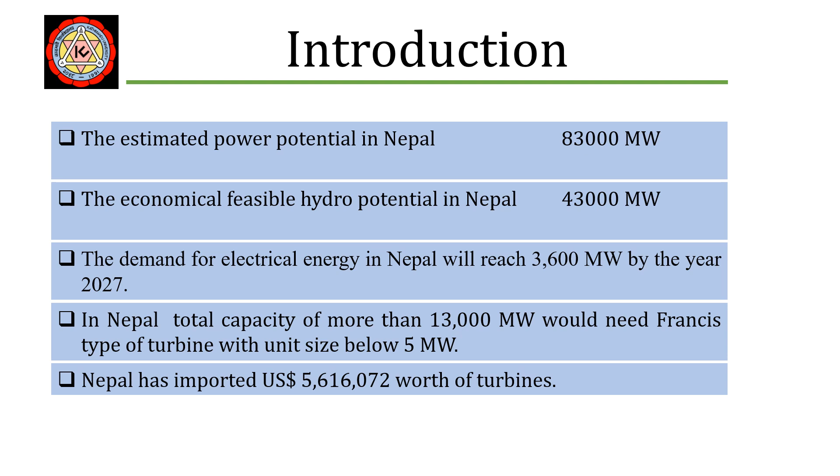Starting from the introduction, the estimated power potential in Nepal is 83,000 megawatt, where the economical feasible hydropower potential in Nepal is only 43,000 megawatt. The demand for electricity energy in Nepal will reach 3600 megawatt by the year 2027. Nepal generally imports turbine from the foreign countries.

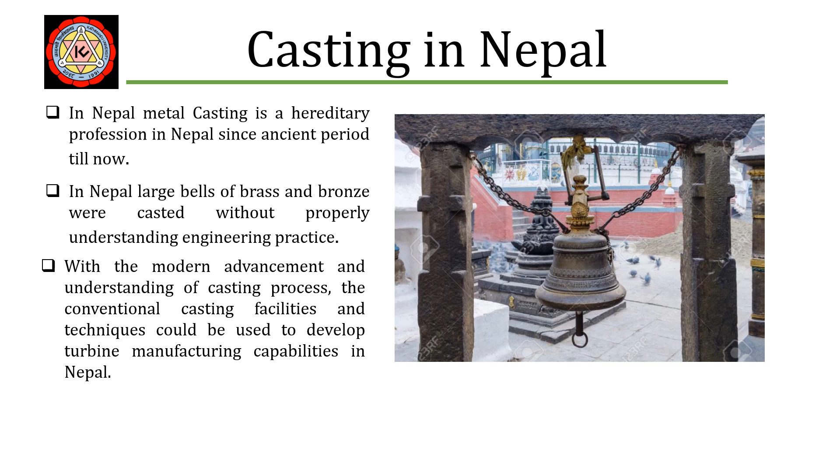With the modern advancement in understanding of casting process, the conventional casting facilities and techniques could be used to develop turbine manufacturing capabilities in Nepal. With these motivations, Turbine Testing Lab has done casting of 14 kilowatt brass Francis turbine by investment casting method.

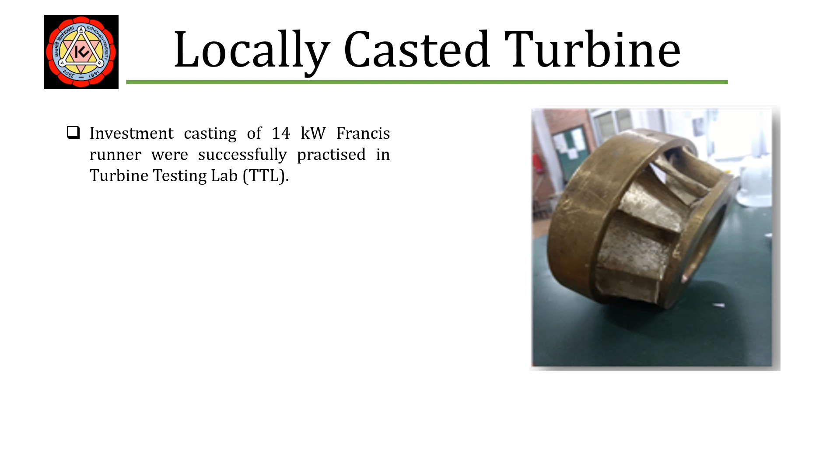So, to conduct our testing of mechanical properties of casted brass Francis turbine, the runner and riser part of the 14 kilowatt Francis runner were collected, and tensile, compressive, Charpy impact testing and microscopic study were performed.

Due to limitation of material for specimen to perform all tests, the chips originated while machining investment casting materials were collected, and again these materials were sand casted to make testing specimens at the same condition as investment casting technique.

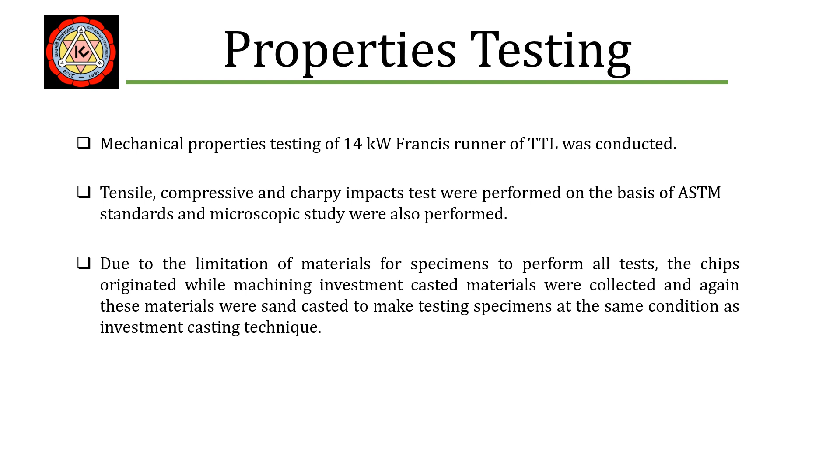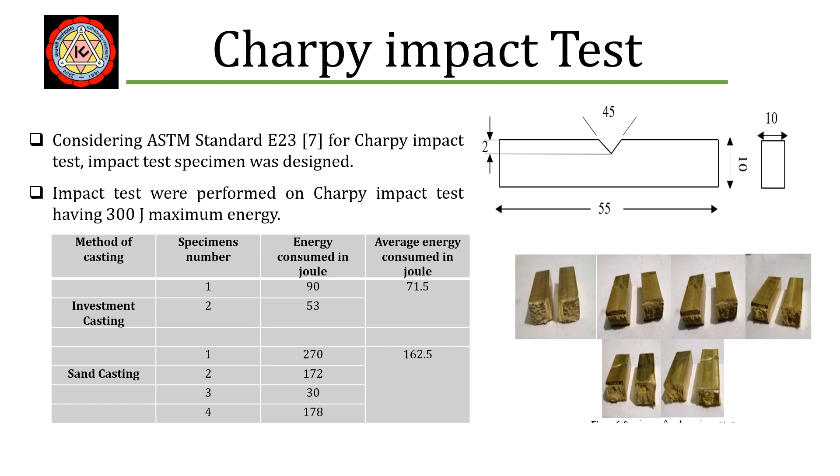Similarly, compression tests were performed by considering ASTM standard. Compressive tests were performed on the compression testing machines having the capacity providing 100 kilonewton of the load. There were 4 specimens of investment casting to perform the compression test. The average compressive strength was found to be 1022.61 megapascal.

There were changes in shapes of the specimen after compression test. Cracks occur for specimen 1 and specimen 4. No cracks were observed in the specimen 2 and specimen 3, but changes in shapes were observed. The materials were assumed to be brittle. The brittle fracture were not observed, but slip dislocation were observed in specimen 1 and specimen 4. This might also be due to the casting defect in 14 kilowatt brass Francis turbine.

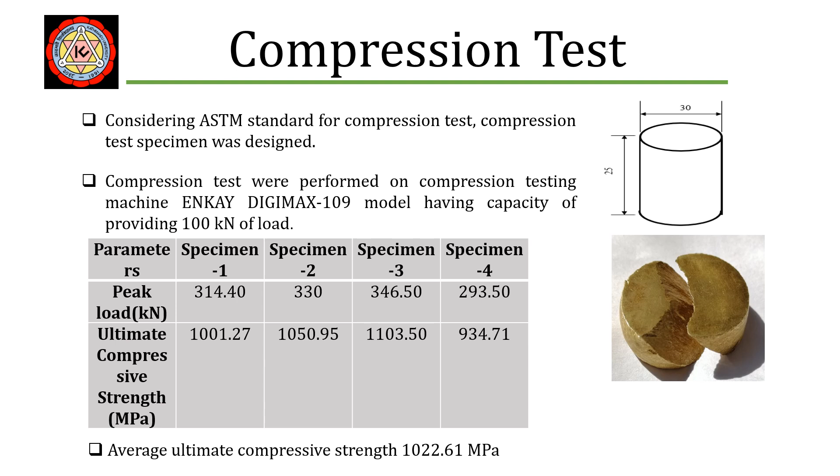In the same manner, tensile testing were performed by considering the ASTM standard. The tensile tests were performed on universal testing machines having the model number UTN-10 with load capacity of 100 kilonewton. As already mentioned, due to the limitations of the materials to perform all the tests, sand castings had been done to perform the test. So all the tensile testing specimens were from the sand casting.

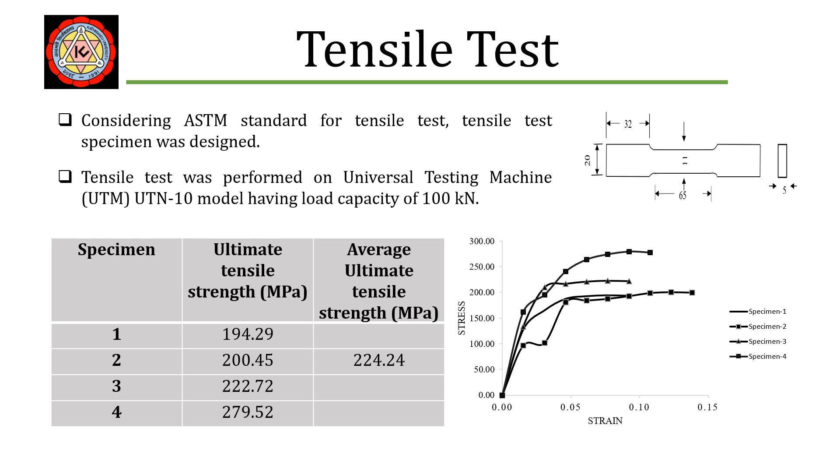Similarly, in specimen 3, fracture occurred near the grip section instead of the gauge section. This might also be due to casting defects and improper gripping of specimens during testing.

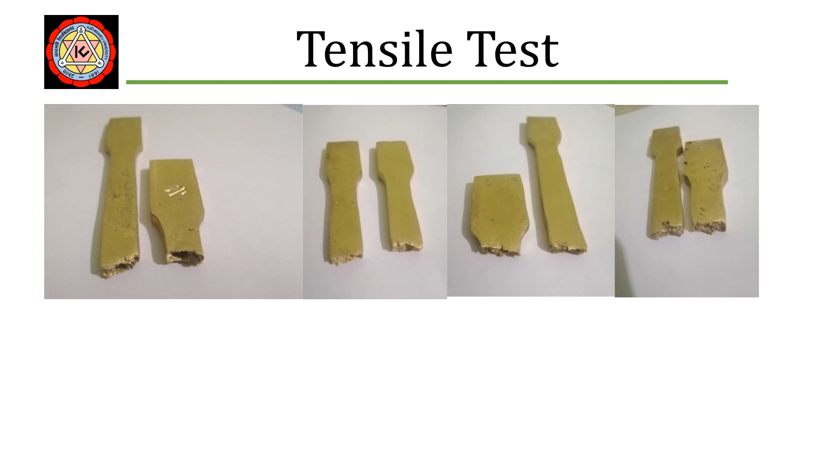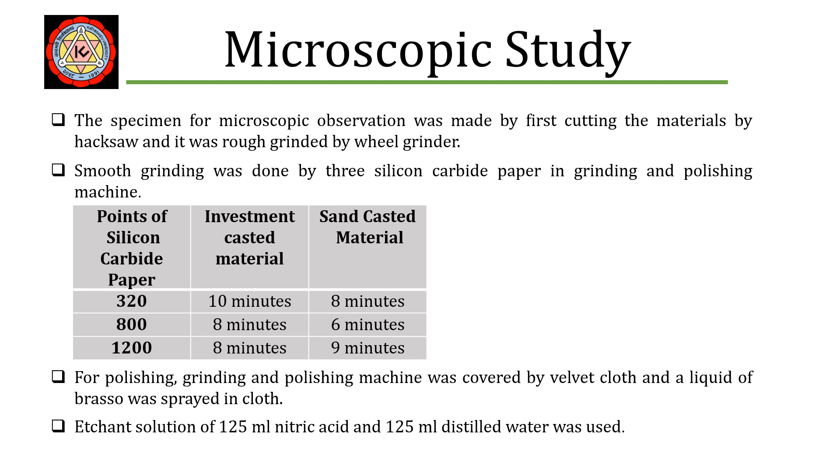For polishing, the grinding and polishing machine was covered by velvet cloth and polishing liquid was spread on the cloth. An etchant solution of 125 ml nitric acid and 125 ml distilled water was used.

The investigated brass is a 60% copper and 40% zinc alloy, casted by melting 60% weight of scrap copper and 40% weight of scrap zinc. The casted brass material consists of 40% weight zinc. The resulting microstructure of the copper zinc alloy is alpha and beta region, because the solubility limit of zinc in copper is about 35%.

A two-phase duplex microstructure could be identified. However, the exact composition of alpha and beta phase could not be evaluated due to the limitation of microscope. This type of alpha beta microstructure is known as Widmanstätten microstructure. The overall mechanical properties of brass alloy depend on alpha and beta composition.

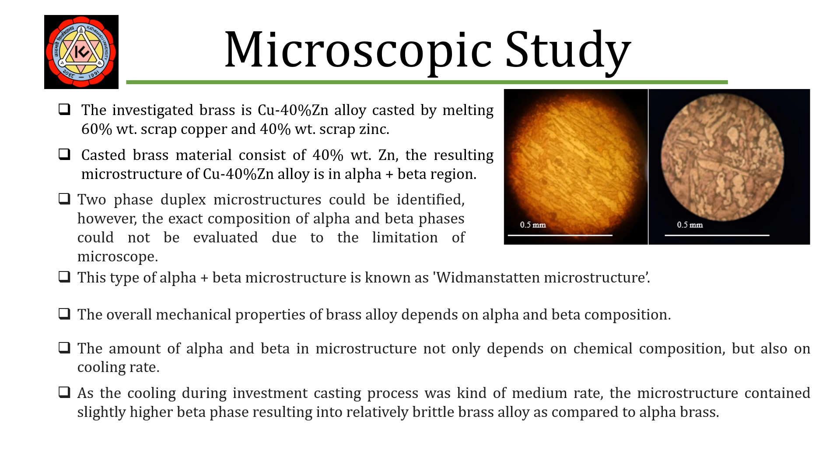The amount of alpha and beta in the microstructure not only depends on chemical composition but also on cooling rate. As the cooling during the investment casting process of the 14 kilowatt Francis runner was at a medium rate, the microstructure contains slightly higher beta phase, resulting in a relatively brittle brass alloy as compared to alpha brass. These are the microscopic observations of sand casted and investment casted brass.

In all the testing, there was some uncertainty, so the results might not be accurate. But the trend of results shows the brittle fracture nature in the tensile and compression testing. The uncertainties are as follows. In the Charpy impact test, the V-notch was made by hacksaw, which could not ensure the exact dimension of the V-notch, so the Charpy impact result might not be accurate.

The UTM machine was not calibrated, so the values of ultimate tensile strength may not be exact, but they show that the material is brittle in nature. Due to problems in taking images of the brass microstructure, there might be error in scaling of the microstructure.

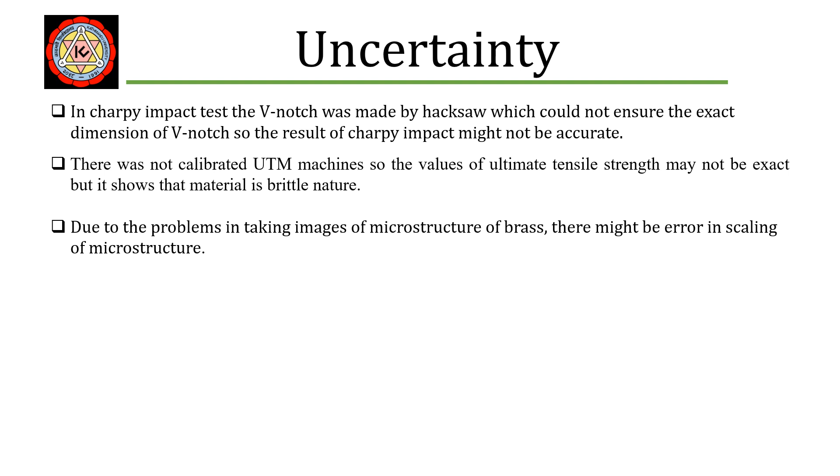So, from all the tests, the following conclusions can be drawn. In the Charpy impact test, the energy absorbed in the sand casted specimen is higher than in the investment casted material due to casting defects in investment casting. For specimen 1 and specimen 4 of the compression test, cracks occurred due to slip dislocations, which might be due to casting defects.

In specimen 2 of the tensile test, there was a void inside the fracture section. This is due to a casting defect. In specimen 3 of the tensile test, the fracture occurred near the grip section instead of the gauge section. This is also due to casting defects and improper gripping of the specimen.

Microscopic study shows the Widmanstätten microstructure. So the properties of brass depend on the composition of alpha and beta phases of the microstructure. Since there is higher beta phase, the casted brass is brittle, and this also validates the tensile and compressive results.